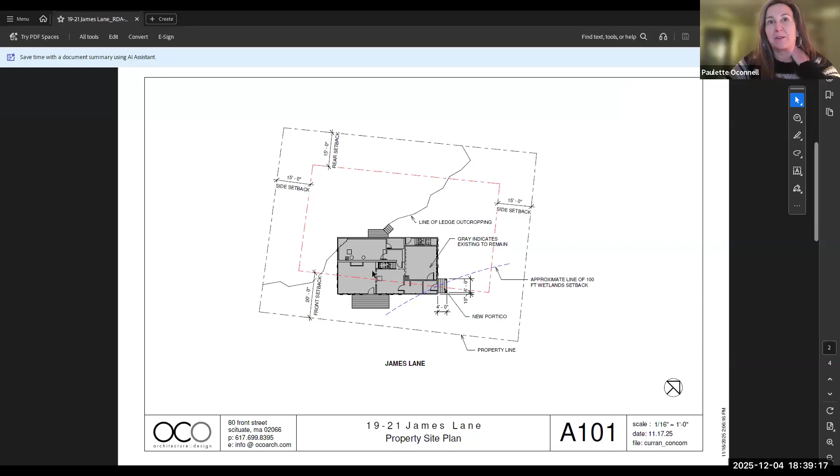So essentially this is the lot in question. Across the street, this is from the Mass Mapper. We can see a line that is wetlands, and that is town parcel over there. So within an estimated 100-foot line, we're looking at it interfering with the corner of the home. Right in that corner, we're trying to add just a covered portico with 2 columns and a small roof, since that's essentially the main entry to the home, although there is a front door off of James Lane. You can kind of see this would be what would be viewed from James Lane on the side, and what you'd be seeing from the driveway side on the property.

So based on the location of the wetlands and that it will be interfering with that corner, we're in front of you for an RDA to see if we could build a small portico within that 100-foot setback line.

Okay, that's it. There's already a driveway there, and then you're just building. There's a current driveway between 15 James Lane and 19 James Lane on that side of the property.

The back corner of the property, if you're looking on this GIS, has a large amount of ledge that comes up almost to the 2nd story. So the rear entry is actually at the 2nd story because of the ledge. The only place you can really occupy a vehicle would be in that bottom left-hand corner, or bottom right-hand corner, I'm sorry.

Thank you. Commissioners, any comments or questions? It looks like this is already disturbed, already covered by a ramp. Is that right? Yes, there's a current ramp there that we will remove, and then we'll just put a small deck in that location. And it's at the edge of the 100-foot buffer, and it's on the other side of the street from the wetlands, right? Correct. Okay, that was it.

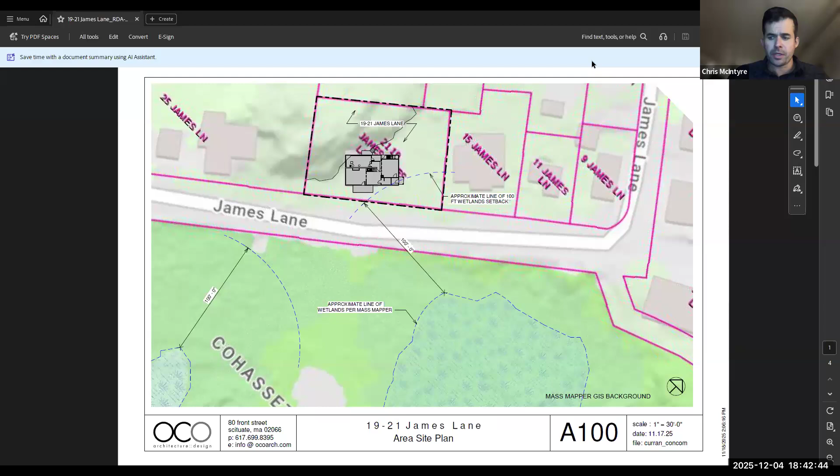With the motion and the second, I'll take a roll call vote of commissioners. Tom Bell, aye. Steve Bagnell, aye. Kathy Berrigan, aye. Will Ashton, aye. And Chris McIntyre, aye. That vote passes 5-0-0.

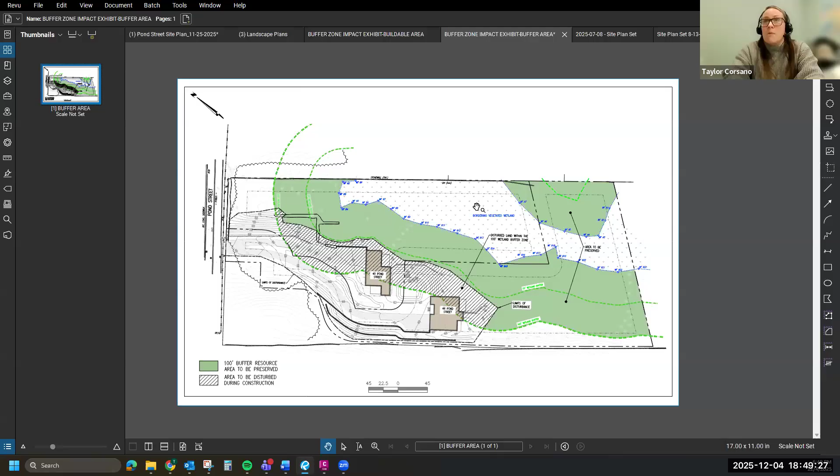With that, I would welcome feedback or comments from the board, since I know it's been a while since we've been in front of you, but we've been working hard in the background.

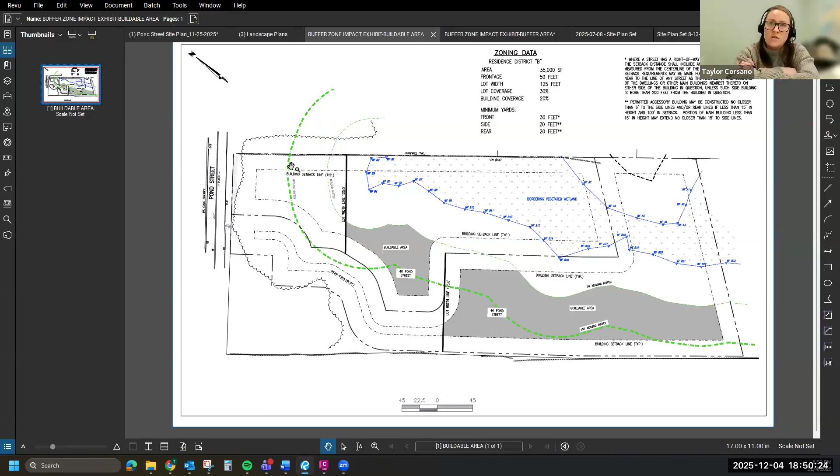There's, it appears like, can you go back to the plan with the... if you were to continue to move that, what would be, or what's the possibility of continuing to move that out of the 100? Is there a reason why it's still more than halfway within the 100?

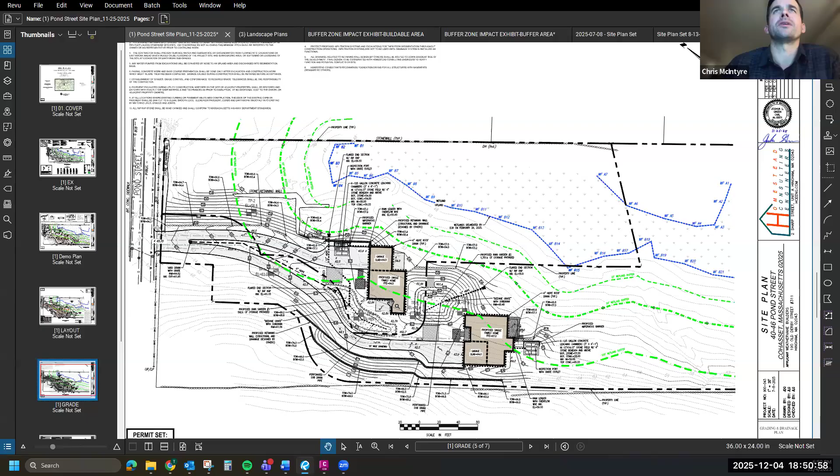So we can definitely try and shift it a little bit more. You do need to maintain 10 feet from the BMP, the rain garden, so it needs to be 10 feet separation from the foundation to the home. So we feel we've best maxed out the site to try and keep the stormwater out of the 100, shifting that lot as best we could to take advantage of all of the upland on that lot.

So we may be able to shift it a little bit more sloping, but not much, just due to the proximity to the rain garden.

And was it the common driveway just outright denied, or is it not possible to have any length of shared driveway? Does it have to be separate all the way to the street, or I see it's partially connected up to... Is there a reason why we couldn't keep that connection further in to keep the driveway more out of the buffer? Perhaps?

We can look at that. I don't know. We can certainly look at that.

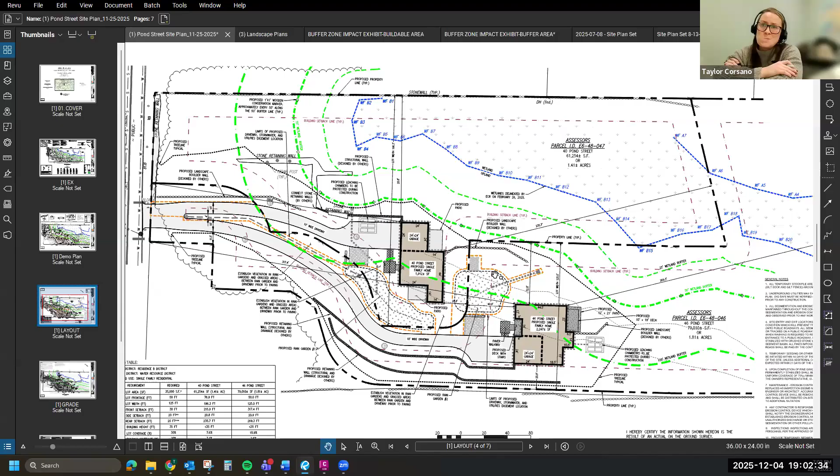Yeah, but I agree with what Mr. Brodsky said, that we've always tried to limit the disturbance closer to the buffer lines. So I like the way it is. Could I see that disturb map again? It seemed like you're already disturbing quite a bit of the area.

Again, there's no work being proposed within the 50-foot no-alteration zone, that's respected. We're talking about work within the 50 to the 100. Right, but the hatched lines there are all the areas that are going to be disturbed anyway. Right, and so obviously, if you're going to disturb it anyway, you could move the rain garden to any part of that disturbed area. Well, I think it has to do with grading, but I'll defer to Taylor.

Yeah, so if we do that, then it would push this thick black line, which is our limit of work, right up against that buffer. And it may increase this wall a little bit. It just has give and take.

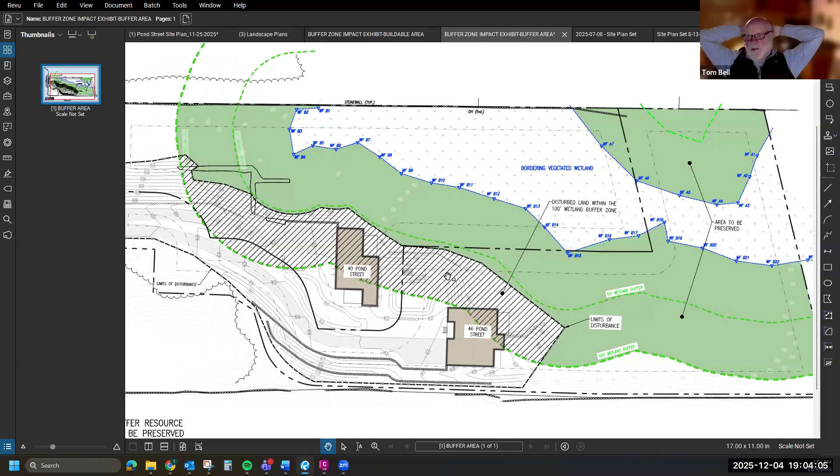So if you remember that site, it slopes down a hill over there. So I think what you're saying is the north edge of the rain garden, if you push it over, pushes your disturbed area further because you have to grade it down. Well, it doesn't have to be that shape necessarily. You're just looking at this as if you're shifting that shape one direction or another. You can achieve the same thing by making a more elongated rain garden, like you proposed for 40 Pond.

Yep, but to Will's point, the grading is tough in this area, and for a rain garden, you have to maintain the berm around it. If you're holding that elevation, say you push that 61 back to now where you have a 50, you're now filling or putting a wall higher than you need because you're trying to catch the grade to go down, not going to the 50.

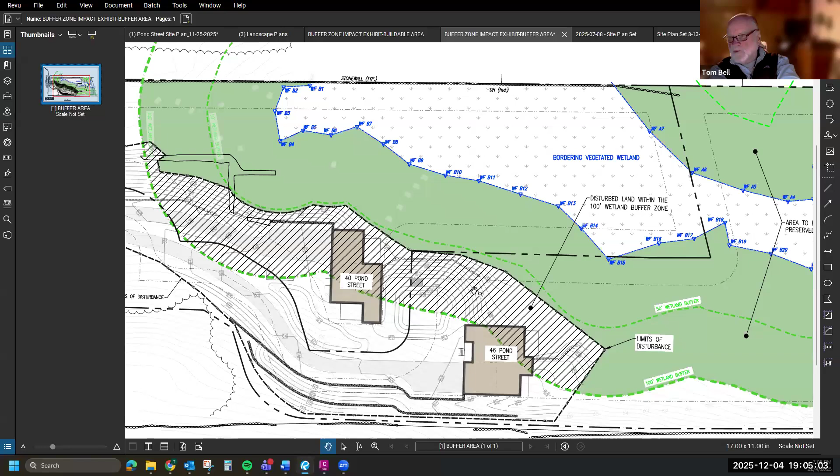Sure, but you've also got something that is channeling rainwater into the ground far more effectively than having an impervious roof. I know you meet your numbers. I'm well aware of that. But from a practical standpoint, we also know that instead of sheet flow on these sites, we end up with concentrated discharge from some of the structures we're talking about, particularly when they overflow.

So I think with a little bit of creativity on your part, you could change the shape of your rain garden and scoot that 46 Pond Street house 15 feet left, putting most of what you're going to do, which will be pervious, in the 100-foot buffer, if not all of it. You're trading off the area at 46 Pond Street for the hard structure, but if it's simply a trade-off, an equal area thing is fine. Move that thing so it's out, and that gives you more room in the 100-foot buffer to stay within the limit of work and the proposed area of disturbance.

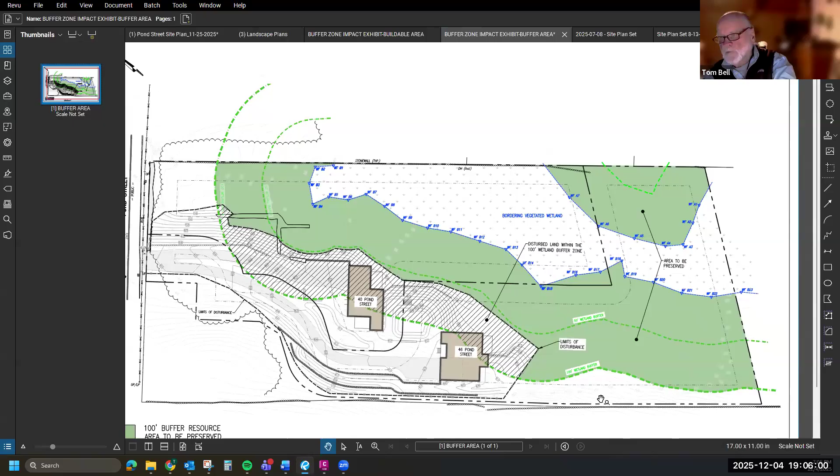And sorry, Josh, did you want to say something? Yeah, could you flip to the grading sheet so it's clear where this grading is now? So with the current design, you can see where that wall is now. Tom, if we move the house forward, even if we elongate it like you're saying, we're going to have more fill closer to the 50. That wall is going to be up against the 50, so you're going to have significant earthwork right on the 50. I think Will had a good point about trying to keep it away as it is.

And yes, you might be trading off a small area of roof that's being discharged to a subsurface system, just outside or just inside the 100-foot, to then putting a rain garden that will have a discharge right on the 50. I just want to make sure a roof discharge to a subsurface system is superior to what would be there, which would end up being lawn. I would agree. So I think the value currently is better than what we'd explore related to fill and putting work right on the 50-foot buffer.

Well, do you really need to have the bottom elevation of that rain garden where it's at? That volume, that thing is maximized right now, or I should say minimized. It's holding just enough volume to meet the requirements. Sure, but what I'm saying is you're doing an awful lot of fill. If the bottom were at a lower elevation, you'd have less fill on the sides. We're up against groundwater.

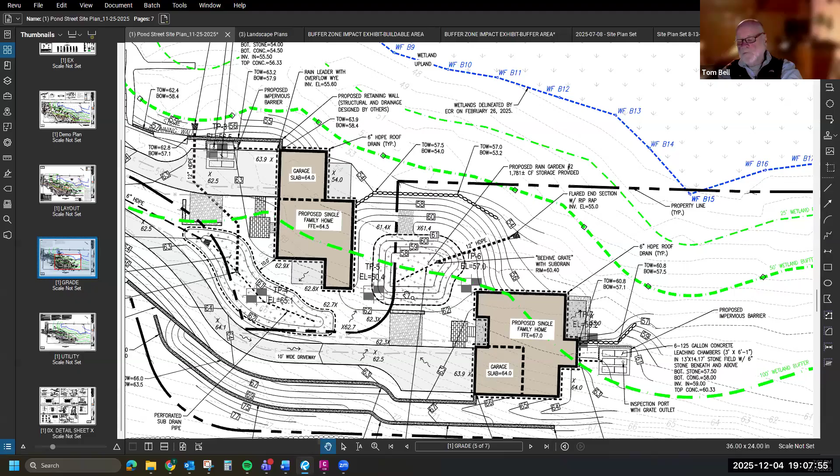So remember the slope, the top half. What's the depth to groundwater there? I want to say it's 3.5 to 4 feet. And we're going on the top half, we're digging in. So yes, on the down gradient side we're filling, but on the top half it's actually a little bit of cut. So we're going into the grade. Okay.

So I just don't want to run through the exercise if we come back with this building outside the 100, or more outside the 100, but then twice as much disturbance up against the 50. And that's where I truly do believe it's going to go based on the berm around the current rain garden. Well, yeah, of course that's where it's going to go. The water's going to go downhill, whether it's underground or on surface.

We do reserve the right to have you demonstrate alternatives, whether or not we're saying we'd approve it. We want to see that the alternative has been explored, including just shifting - I don't know if the rain garden would have to be shifted for the home itself to be pushed towards the setback line, which was shown on the other plan. And same with the other home. If you can, as you alluded to, alter the shape, shift it, or rotate it to maximize the amount of house that is not in the 100. That's what our interest is.

So has that rain garden changed shape and dimension since the shared driveway was proposed? It has. It has. Is it smaller now or larger? I think it's probably similar. It changed in shape a little bit, and I think it might have gotten a little bit bigger. So there were 2 rain gardens to start with, weren't there? Yep, and we still have 2 proposed. And are they both the same size as they were? They are larger. So the rain gardens have gotten larger.

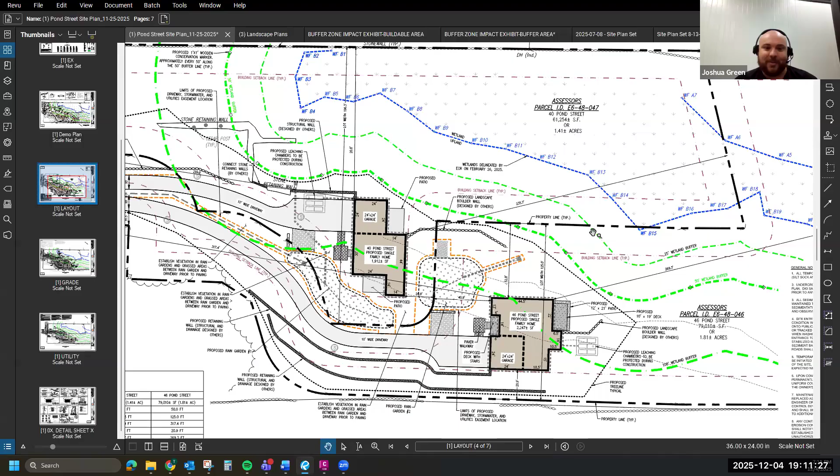I'm just wondering whether this was designed for a different system, and now you've changed the driveway configurations, but haven't revisited the location and size of your rain gardens. We did review the sizes for the stormwater events that we're required to. The discharges are meeting the requirements. Our goal, as Taylor stated, was to minimize disturbance as much as possible near the 50, and that's what we tried to do here.

Yeah, I just want to clarify. Someone said that our interest is minimizing disturbance in the 50 to 100, and I don't think that it legally is. Our interest is minimizing or eliminating the impact to the wetlands. It's just that our jurisdiction extends 100 feet from the wetlands. So if all of this water from the roof and driveway is going into subsurface infiltration and rain gardens, I think we've mitigated the effect on the wetlands.

What about, would the required size of the rain gardens shift or be reduced if you included pervious driveways? A little bit, but I think we would still want to make sure that we're accounting for runoff. I don't think there's any downside or upside, I would say, to shrinking them the way they are now. It'd be a minimal change.

Even gravel or seashells, something like that, the fact of how impervious it is doesn't create much of a change as far as the stormwater calculation is concerned. The curve number treatment, is that what you're talking about? Yes, the CN number, the curve number, would not change much.

What are the numbers for pervious versus impervious pavement? 98, and at best I like to use like 88 for a seashell driveway. So it's a small change overall, especially with the soils on site. And what's lawn? You got me, I'd estimate that's 64, okay, depending on the soil group. I forget exactly what we had on this one.

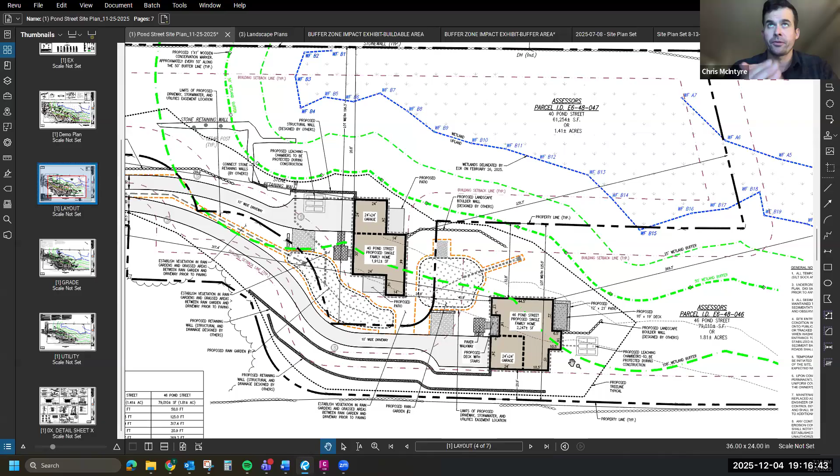I don't know if my question was answered, but if the 46 were to be shifted further out of the 100 towards the rain garden, is there a setback for the rain garden from the house? The setback was shown on the other plan for the house, but is that distance required for the rain garden due to sloping, or is there a reason why you're so far away from it and into the 100?

So the minimum setback to a rain garden is 10 feet, and I believe we are at that. Stormwater management requires 10 feet from the BMP to the foundation. So the same thing we run into over here as well, maintaining that's why you have those funky curves.

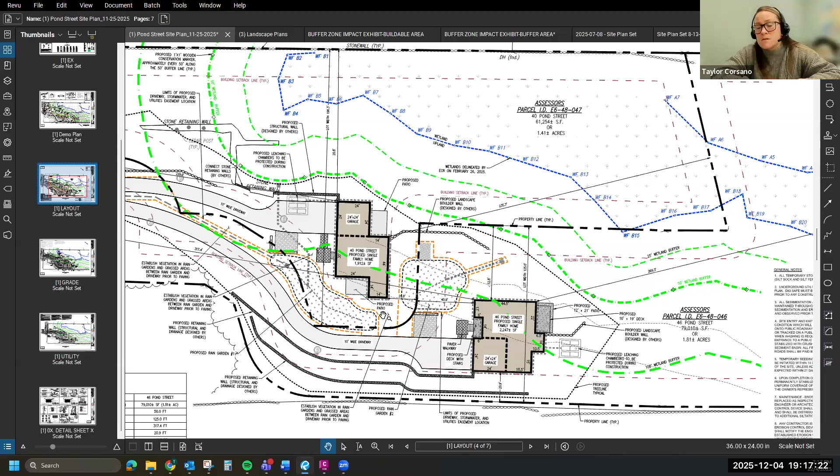So an alternative would, I think, is what we're looking for. At least not necessarily to take that alternative, but to explore it and make your case that this is really the better design. And so I'm open to that. I think that's a good idea.

I think before we close it up for tonight, we need to see the landscape plan, and there may be issues we have some concerns about. Mr. Chair, I'll just briefly add that Sanji is caught up from the second hearing, but he did miss the first like 8 minutes. So I don't know if the applicant or their team would either like to refresh him or if they're comfortable with him weighing in on his thoughts on the site plan based on what he heard, just missing the first 8 minutes. I'll defer to you guys on that before we go to the landscape plan.

Well, Ms. Spector, just to be efficient, we'd like to hear what Mr. Fernando has to say.

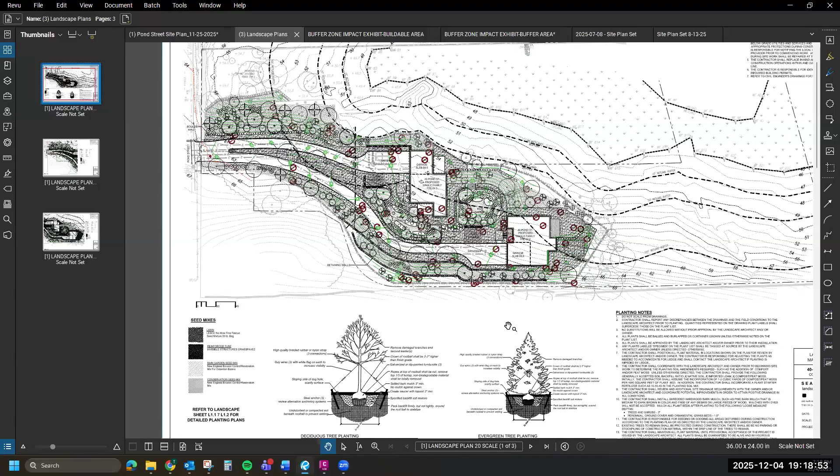Okay, yeah, I think I sort of feel like the decision on the placement of both rain gardens doesn't have to be coupled. Like one could be out, one could be in those buffer zones. I do think I'm aligned with one of the other commissioners' point of view, where ultimately it's protecting the wetlands. So I see that as the first principle here. I think what we're asking for is an alternative analysis to demonstrate that and to show that that's been fully explored rather than just kind of discussing it. We want to see them at least pull some numbers and demonstrate that a little bit more clearly.

If that's the case, then I think we'd all agree. All right, so onto the landscaping plan.

We don't have Sean here with us tonight, but if there's comments or questions on it, we can certainly ask him to come next meeting. But I think we'd like feedback if there is any on this plan as you guys have today.

Yeah, I mean, the basic thing is obviously a lot of trees coming out, and the replacement in the 100, I don't believe matched the number coming out. Typically we would look for 1-to-1 replacement of trees in the 100. So Sean's not here, but I'll just leave that comment with you if you can't speak to it.

Yeah, and I did do a review of the plans beforehand, and I did count the 1-for-1 within the buffer. But I can certainly just ask him to confirm that.

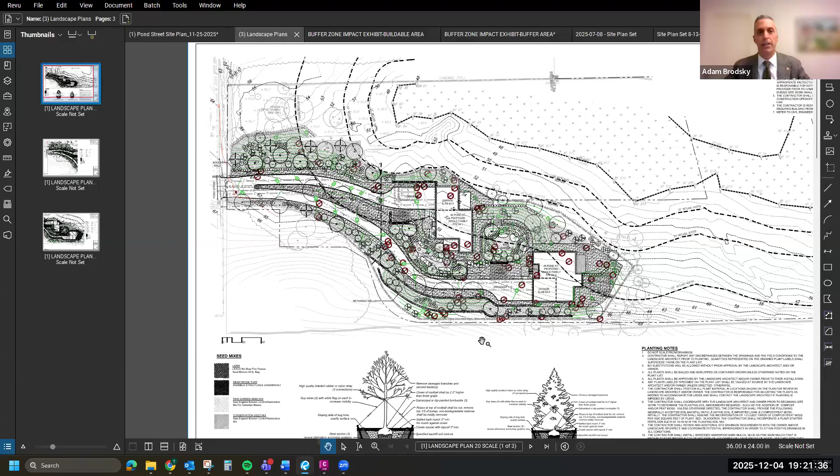At least that's what I noted, but again, I'll defer to the commission on any tree replacement and planting comments there.

Well, I don't think we'd be requiring replacement of dead trees. No, I don't think so.

My only concern that I wanted to bring up with this was the 1-for-1 replacement is kind of rigid, because if the area that you're replanting is smaller than what was there previously, the new trees may choke out, they may be too close together to thrive. So I think it's more important to look at the area that's there and the proper spacing of trees instead of trying to jam the same amount that were there before into a smaller area.

Yeah, and we would talk to Sean about that. They have the buffer zone, their lot goes well beyond that. We consider alternatives for that, but that's not our official standard, but that's been rule of thumb of late, at least in my time. That's been what we've looked for.

And so if there's alternatives to add trees further down the line to the 100 buffers, outside the limit of work, that's an acceptable option as well. I would say if the tree expert says that they won't thrive if you don't have enough spacing, obviously we'd consider that. And I think in general the arborist should be selecting holes in the canopy to target, and not be too worried about proximity to the home.

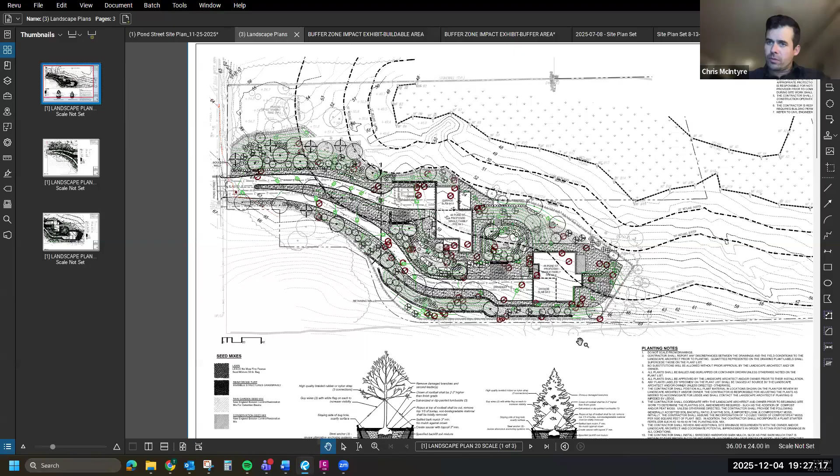Yeah, also the potential for using pervious driveway - I think we'd be interested in whether or not it's going to reduce the size of the rain garden. It's still, in my mind anyways, an improvement. And I think that's it.

Anything else, Charlotte? Did you have? Just that, Mr. Chair, we have a hand that's been raised in the audience. So I didn't know if you wanted to finish your summary first, or move on to any comments from the public. No, did I miss anything summary wise?

In terms of what we've discussed, yeah, definitely. I think you've covered everything in terms of the alternatives, the tree stuff, having Sean at the hearing, considering pervious driveways, switching rain gardens with the impervious surfaces, and then maybe some clarification on any driveway specifications that may come about from other discussions, just so that we're aware, since some of that impervious driveway is now proposed in the 100-foot buffer.

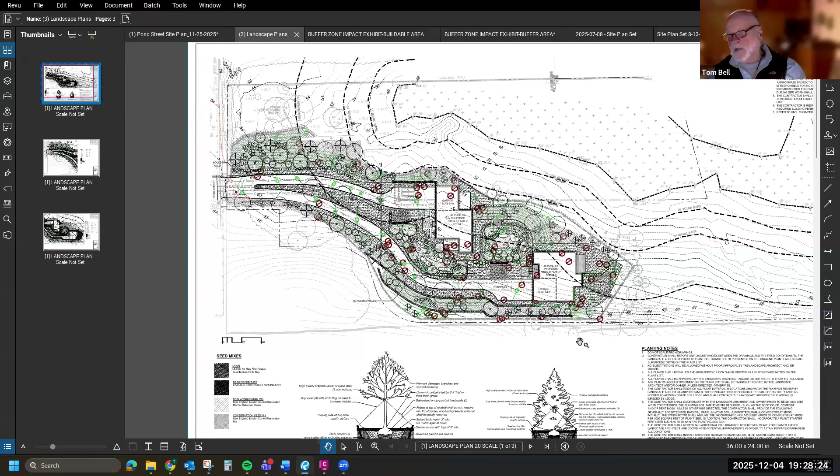Just one last comment - if that rain garden on the right could be built at a lower elevation, there'd be a lot less fill necessary. There might be more cutting, but less fill, less of a steep embankment there. It might blend into the topography a little better. We can definitely look at it, but as mentioned, I do think we're maxed out with groundwater, but we'll take a look.

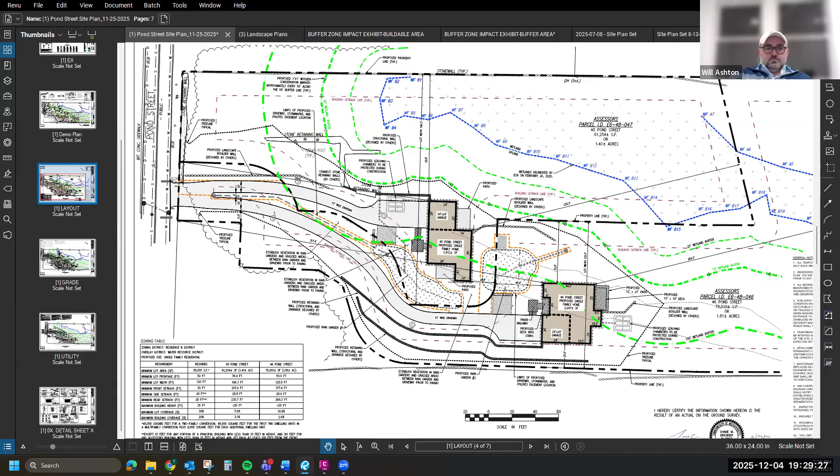Hello, thanks very much. Yes, my name is Mary Jo Larson, and my address is 12 Virginia Lane. So our home is situated directly above the western side of this watershed, and I think an aspect of this discussion that I hope you will address relates to the heavy storm water that floods down from the western side of this property. So before there was a wall, like a 70-foot wall that was planned to protect the driveway or the driveways of these two properties. So if you don't mind, I hope we can address that question. And the other is 46 Pond Street looks larger to me.

You're assuming that it has to be that large. I actually would appreciate seeing an option of moving that 15 feet closer to Pond Street and considering adjusting the size, but that's just my perspective. I wanted to add that there is much more information about why the common driveway was not approved, and I'm sure that it would be of interest to you because it does affect the way the water flows and what happens to the properties on Virginia Lane. So with the construction of, if you don't mind, I would like to know just in general whether or not 46 has been enlarged. I see that rain gardens have been enlarged, and I'll go ahead and make a comment about the flow of water that will be affected by the wall that is proposed, a 70-foot wall.

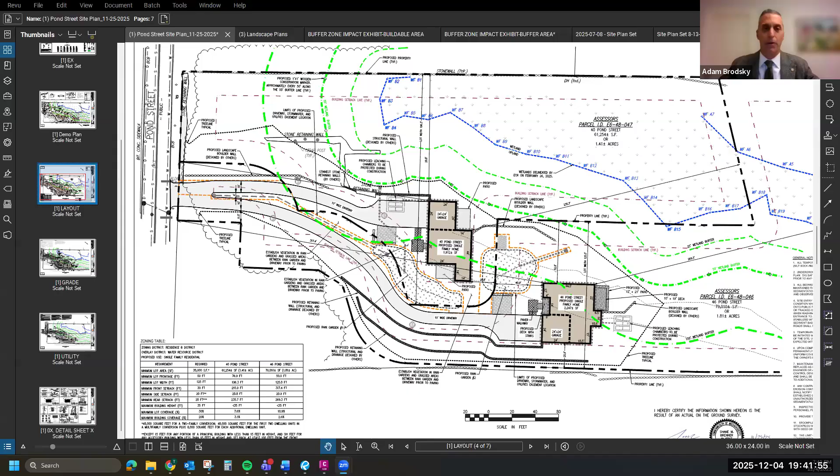Well, my request stands. If they could consider that, I would certainly welcome hearing them when they come back. So I don't have anything else. Any other commissioners have any last comments or questions before we continue?

No? Then Charlotte, when are we continuing to, 2 weeks out? Is that our last meeting of the year, December 18th? That's in 2 weeks - we actually do have our schedule. I was actually going to post that today but forgot about it. So if December 18th does not work, there will be a meeting on January 8th and January 22nd of 2026.

Charlotte, if you can just remind me, what is the filing date for revised materials for the 18th hearing? Or the week in 11th? In advance, so that would be the Thursday before, on the 11th.

And for that meeting, it's just the alternatives suggested here today. So alternatives and a clarification on the tree count - how many are being removed, replaced - and then, again, the consideration of reconfiguring rain gardens, the houses, the structures to get it further out of the 100-foot buffer.

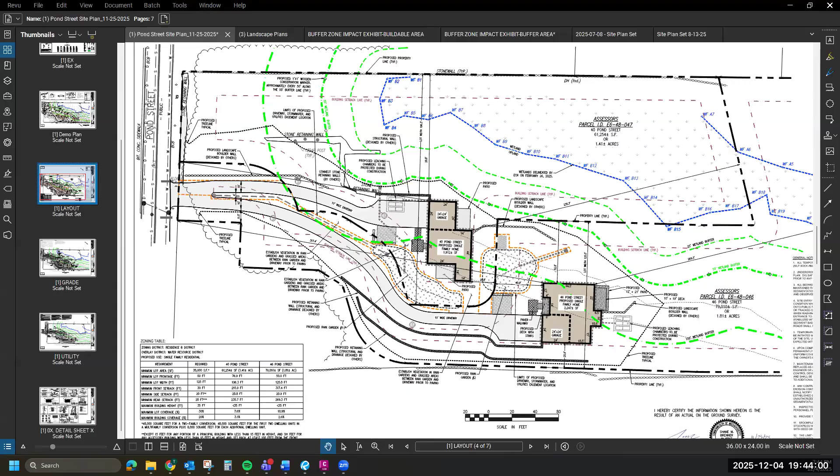Sean, just to confirm that last point - obviously Sean's always welcome to present. I think we were just looking at the counts, right? Just to match up the counts, there was some discrepancy. Yes, but I think some commissioners noted that some plantings appeared to be a little crowded. So it sounds like we wanted them spaced out a little bit more, but if I misspoke, someone correct me. I think we were split on that.

Maybe we could just see a spread out plan. We went back and forth on canopy for a while, right? Yeah, I think everyone has slightly different thoughts there. We need to make sure that we've got Sean Papich available for the next hearing so he can answer questions more directly.

So Taylor, would the 18th work for you for now, or would you feel safer choosing one of the January meetings? Probably one of the January meetings, just with the holidays coming up and people's time off. Sorry, was that the 8th you said? Yep, so it'd be January 8th and January 22nd. Okay, I think January 8th should work. Then we'll continue to January 8th.

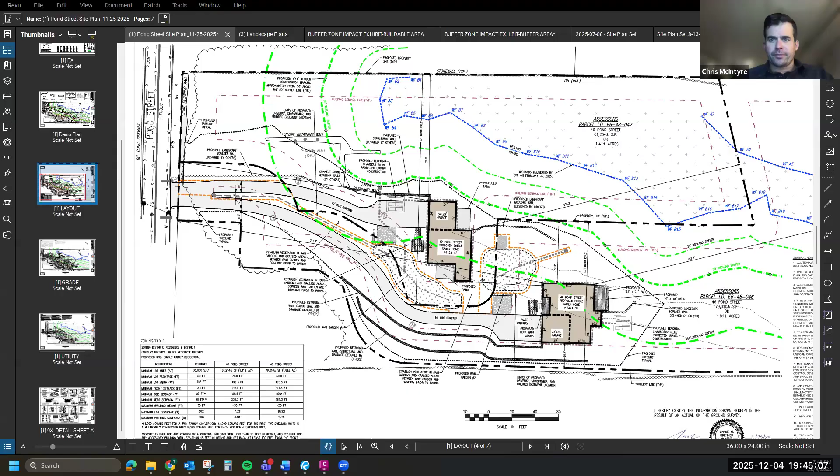Thank you, Chair McIntyre. My condolences to Mr. Bell and his family. Thank you. Thank you all. Thank you. Have a good evening, guys. Have a good night.

Okay, next up, certificates of compliance.

Do we have anyone that just have the two? Do we have anyone in the audience that we want to shift these around for, or is it - no. So actually, last minute, these two COCs, NOI 2318, Stormwater Permit 2313 for 3135 Elm, we continued that to December 18th.

They are working on a mitigation plan, but there may be some new developments where they may choose to submit an amended NOI in the future. They're going to look at that more together and come back on the 18th. And then 6 Deep Run, Stormwater Permit 2320, that COC discussion was also continued to December 18th - they just need some more time to address questions brought up during the final inspection.

Great. So then any agent updates or anything else?

So, 20 Sanctuary Pond Road, this was just a tree violation in terms of they took out one tree in the 100-foot buffer. They have since replaced that and planted it. Tree looks good, so I'm just going to send them a follow-up letter. This one was not a show cause hearing because it was just a first time violation, the owners didn't know.